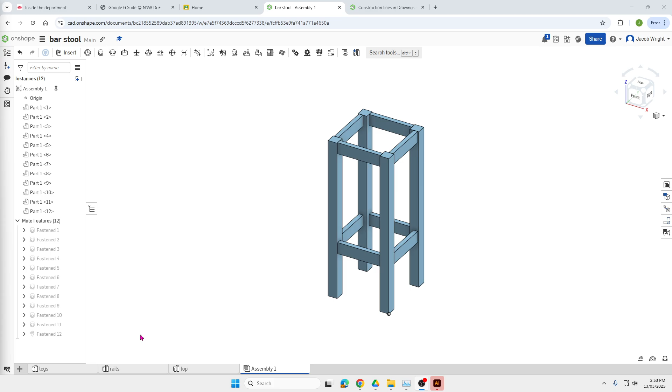I'm going to start off with the rails. Similar to what I've done in the toolbox video, if you've watched that one, I'm just going to show you how we can add a nice little curved cutout to this and ways we can modify it to get a couple of different aesthetics. I'm also going to show you how we can add some chamfers to some key edges to soften the boxy look of it. So to start with, I'm going to do the little curved cutout.

I'm going to select my sketch tool and click on the end face here, or the side face. I'm going to use my line tool to draw some lines out from the center point. To find the center point, we scroll along the line until the little logo changes to that solid line with a dot in the middle of it, not the T. We want that solid line with the dot just there.

I'm going to start there and draw a line out in each direction. This way first — let's just pull these measurements out of nowhere and we'll have a look and see what it looks like, and we can modify it after if we're not happy. So I'm just going to come 40mm that way. I'm going to deselect my line tool, select it again using the L key, and go 40mm the other way. It's important we do the same measurement so it looks symmetrical.

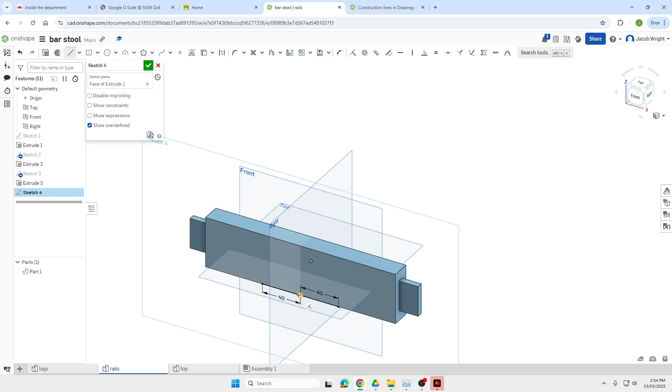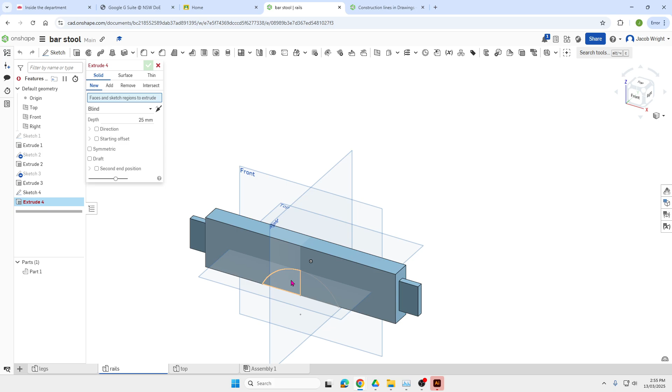I'm then going to deselect my line tool, select it again, and go up — let's go up to the center point, which is 25. Last thing I'm going to do is use my 3-point arc tool to select two end points and meet in the middle. Then tick the sketch. I'm then just going to use the extrude tool to click on those two little bits of the half circle, remove the full thickness, which was 19, and hit the tick.

Now, I'm not really happy with that — looks a little bit random for an arc. So I'm going to go back into that sketch and modify some of these and we'll see how it starts to look. Instead of 40, let's take that out to 75. Let's see if we make it really long, if it looks a bit nicer. I'm not going to change the height, we'll just change the overall width of it. Yeah, I like that a lot better.

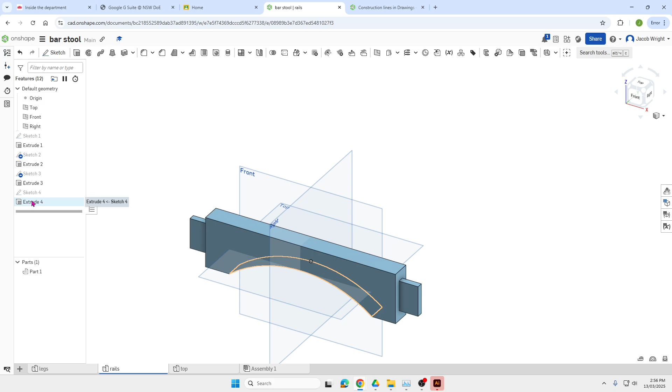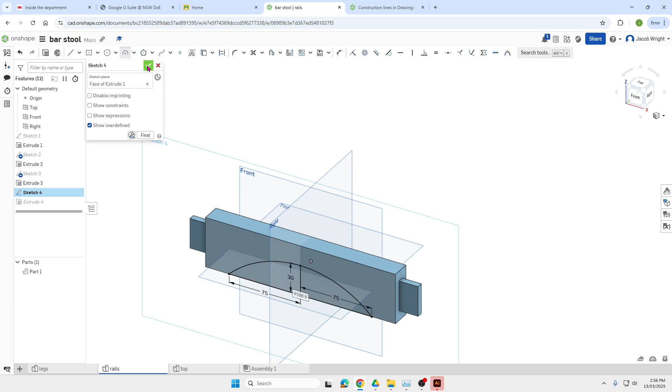Little things like that, we can play around with the length of it. You could also play around with the depth of it, in the sketch. So I could delete this line and instead of going to the center I could do say 30mm up, delete the curve and do the curve again. So line, dot to dot in the middle, tick — and you can see the extrude still stays there.

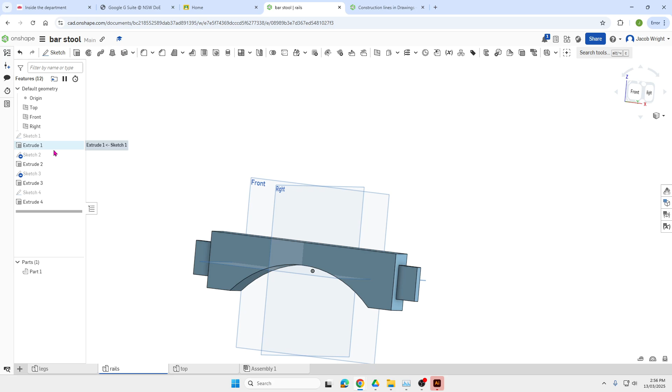The more you take off, the weaker the rail's going to get in the center, so you don't want to take too much off, but you can have a play around with different lengths and heights, and come back to the assembly and see what it's going to look like in the stool. You can already see it's starting to look a bit different. You could get really fancy if you wanted, and in that sketch do a couple of curves, a single curve, or something a bit blocky — there's all sorts of things we can do. Have a play around, use your imagination, but that's a basic cutout we can do.

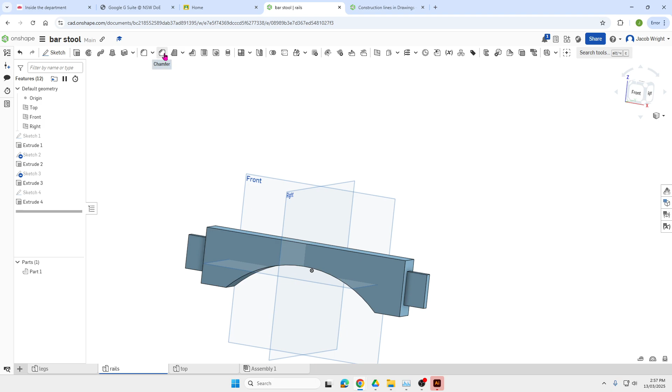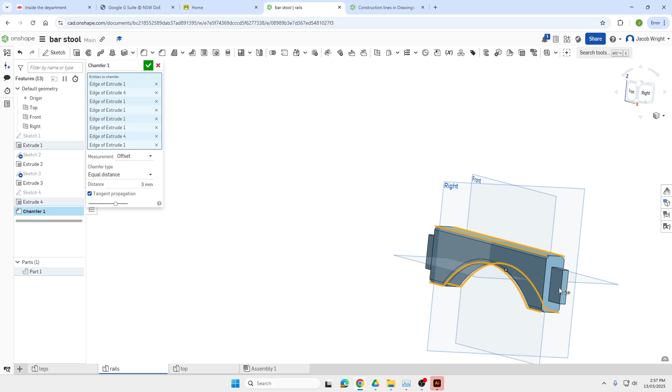Now, to soften it even more, I'm going to use the chamfer tool up the top here, and select just the edges that don't come directly in contact with the face when the mortise and tenon joints come together. Alright, so I've got all those — that's a 3mm chamfer. Let's just leave it at 3mm for now and have a look and see what that looks like. I think that's pretty nice.

Go into the assembly — yeah, you can already see a big difference, just some little chamfers and that rounded cutout makes. Very, very different to that original blocky look that we had. Now I'm going to show you something we can do with the legs.

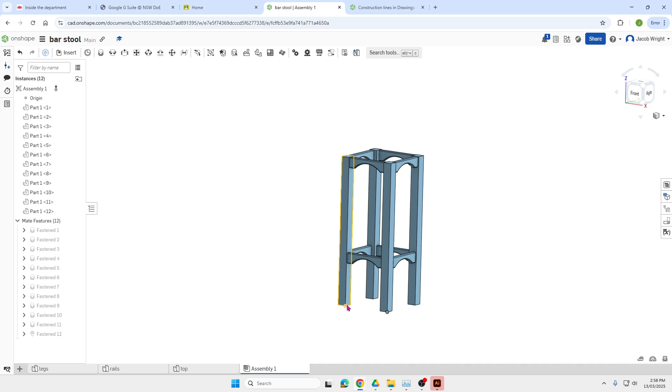So we have our legs here. I'm going to put some tapers on these legs. If I'm looking at the outside of the leg, I'm going to use the assembly to help me. If my mortises are here, I want my tapers to be on the inside edge. So mortise here, mortise on the back there, I'm going to measure in a certain amount and do a diagonal taper almost up to where this bottom rail is. I'm going to do a nice big taper on both sides.

The beauty of these is if you get them wrong, and chances are I might even get it wrong doing it here, you just delete the sketch and fix it up. So I'm going to sketch the taper on this face, and put the offsets that I need. I'm going to just make these up and see what it looks like, and if I have to change them, I'll change them.

So I'm going to do an offset in from this one. Actually, no, I'll go offset from the other face instead. I'm just going to do Control Z to delete that. I'm going to do the offset from this face in.

If it's 42, let's do half, let's do 21. I'm then going to do an offset from the bottom upwards. Now I know to the top of that mortise was 240, and the mortise is 30, so that's 210. Plus there's a little 10mm offset on the bottom, so that's 200. So let's go up 200.

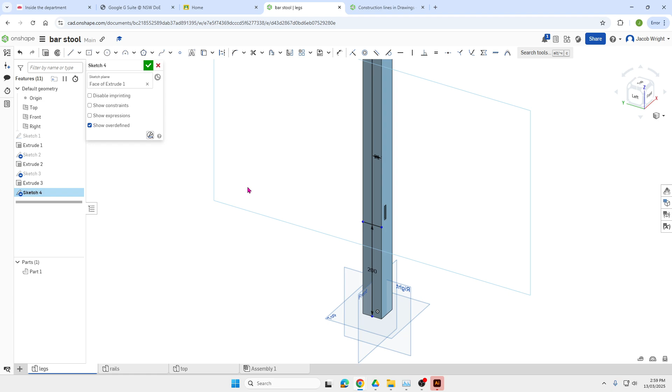Okay, so I've got 2 points there. I can now get my line tool, and mark from there up to there, hit my tick, and I'm then going to extrude and remove all of that, so 42mm. Okay, and you can see I've got a single taper.

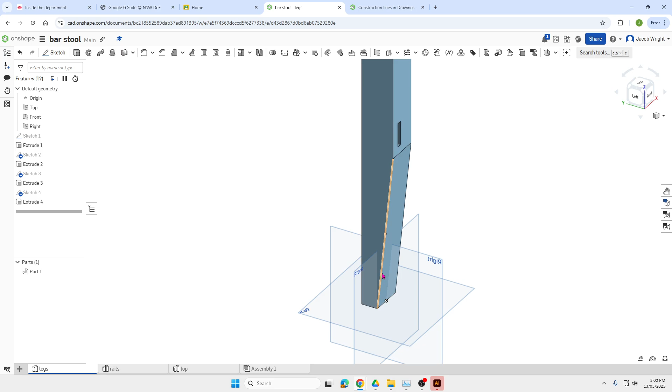So if I go back to my stool, you can see I've got one taper. Now it looks a bit funny at the moment because it's on different angles for each bit. I'm going to do a double. So if I now go to my legs, if I rotate around to this one, I need to do exactly the same thing on this face. I just need to make sure my offsets come from the same spot.

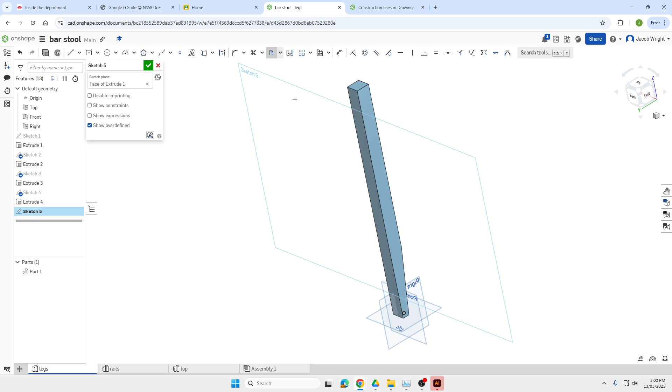If I need to go back and check them, I can double check in this sketch. It was 200 up and 21 in. So this time I'm going to sketch from here and do my 200 up, and another offset - and we didn't want to be from that edge, I just realized. Control Z, I want to be from the outside edge. This just makes it easier if you want to modify them. Make sure it's from the same edge on each one.

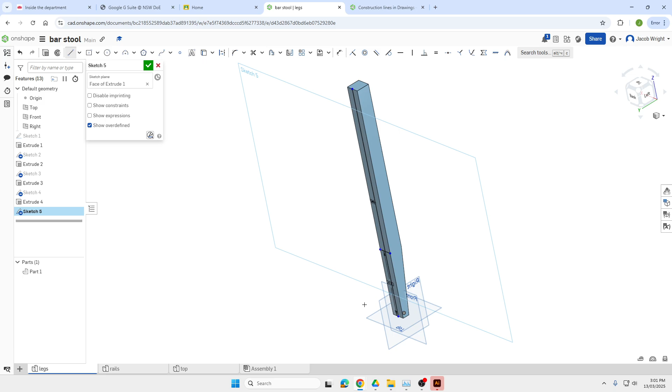So 21. Okay, and then use our line tool to draw our diagonal line. Click our tick. Use our extrude to remove our full 42. Okay, and hit OK. So let's go back to what it looks like from front. You can see we've got two tapers here, and if I go back to the assembly, you can see we've got a nice high taper.

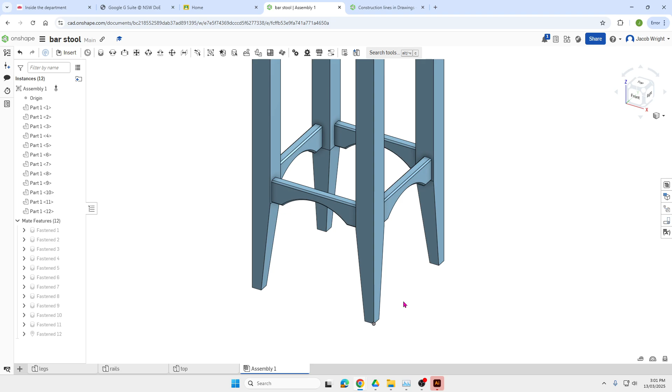Now I reckon it actually looks a bit funny with how close it's right at the bottom of this rail, so I'm not really happy with that. I think it's a bit too high, so I'm going to go back into my leg and modify it. I don't want it to be 200, let's just go to 150.

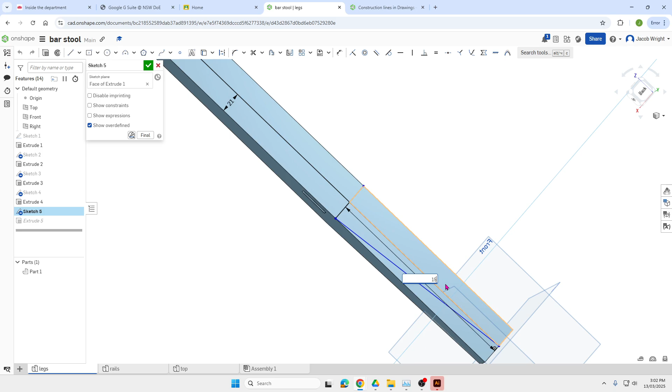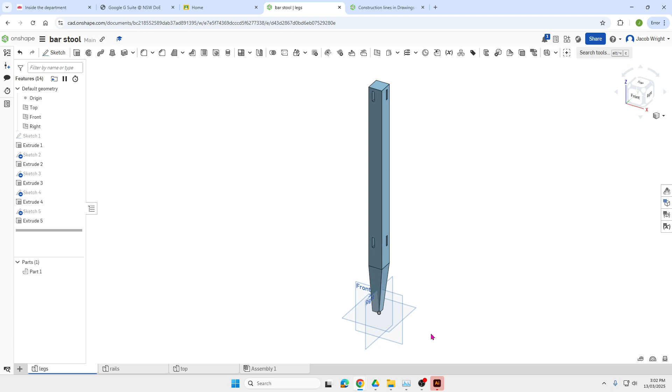So I modify that one, accept it, go to sketch - oh that was the one I just did, so sketch 4 instead, spin round, make that one 150 as well. Okay, let's reorientate this. They're even, I can see it's the same line. Go back to my assembly. Yeah, I like that a little bit better.

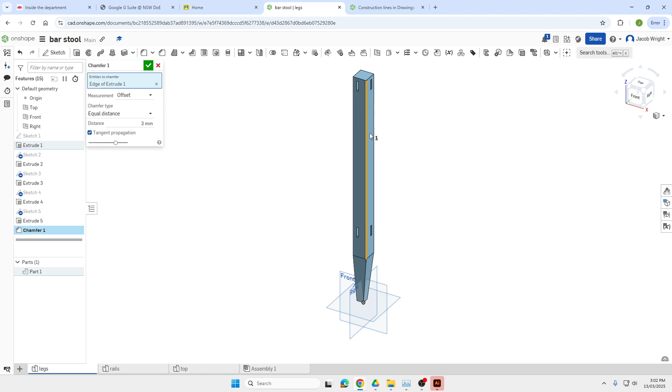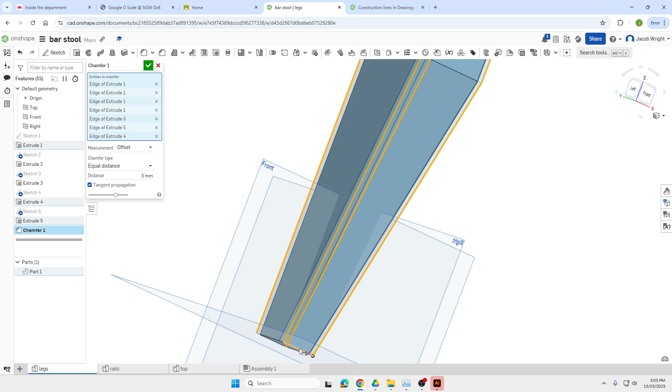Okay, so that's just a simple dual taper. I'm also going to apply a chamfer, same 3mm chamfer to most of the edges of this one as well. I'm going to do them down through these as well. Got one more just here.

And I'm even going to put a little one on the bottom to stop it from chipping out. We'll see what it looks like. I can always come back and get rid of it. Tick. Let's have a look in the assembly.

Yeah, so you can see I've taken that real basic boxy stool frame and turned it into something with a few design features. I've got these rounded cutouts with some little 3mm chamfers. Got a dual taper on the bottom of the leg, again 3mm chamfers all around. We've dressed up that real basic boxy stool with some nice simple design modifications.

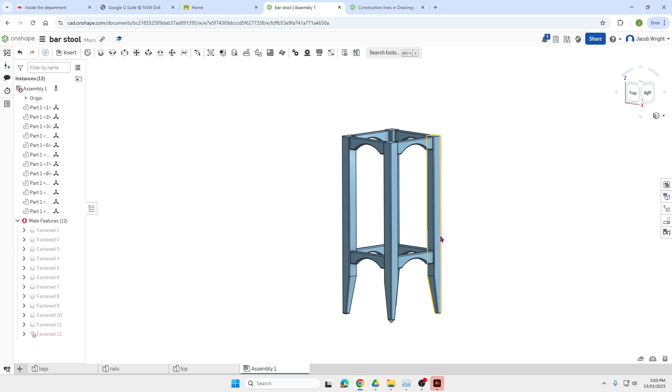I'll show you in the next video how to create the top to go on top of it. See you there.